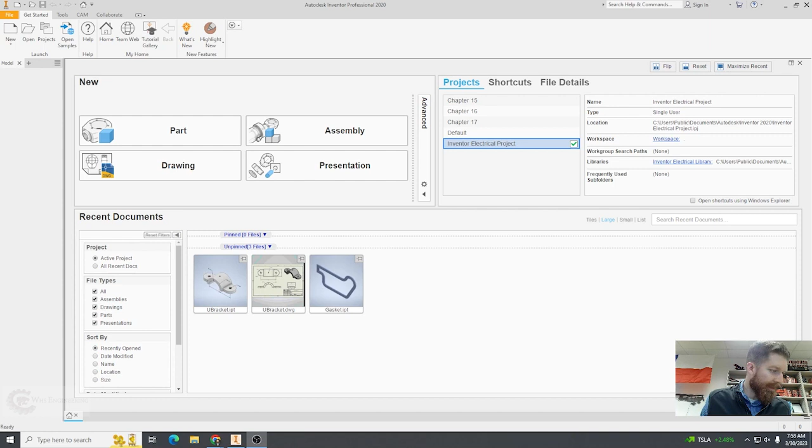Chapter 10 today, Introduction to 3D Printing. Learning Objectives: Understand the History and Development of 3D Printing. I'm not going to get into that, I'm going to let you read the book for yourself. I don't want to bore you.

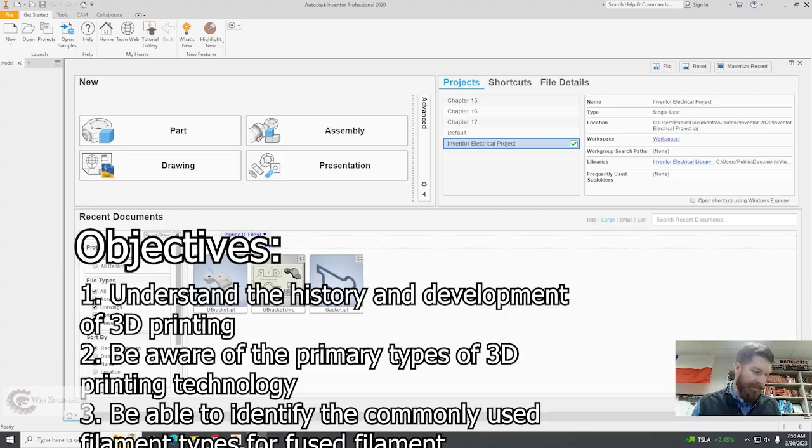Be aware of the primary types of 3D printing technologies, be able to identify the commonly used filament types, and understand the general procedure for 3D printing. That's where we're going to spend most of our time, going from a model to the 3D printed format. So we're going to use the rod guide from chapter 9. I don't have it saved on this computer, so I'm just going to model it up really quickly.

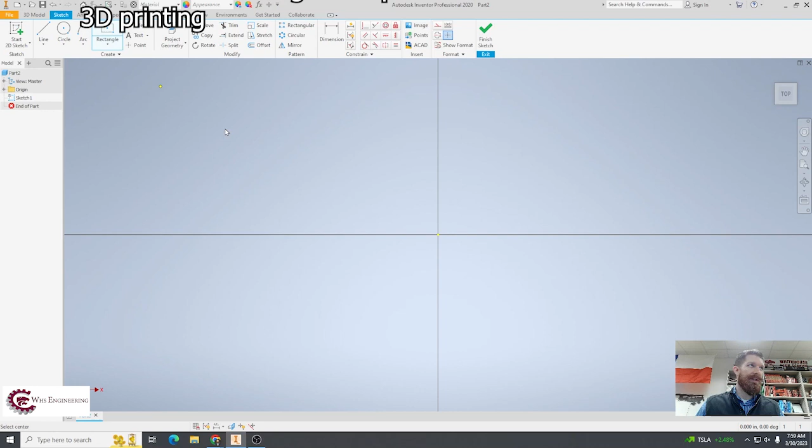This is from chapter 9. Mr. Dieter may have already shown you how to do this, I'm not sure. Let's start with the center point rectangle, with 1/4 inch fillets all the way around.

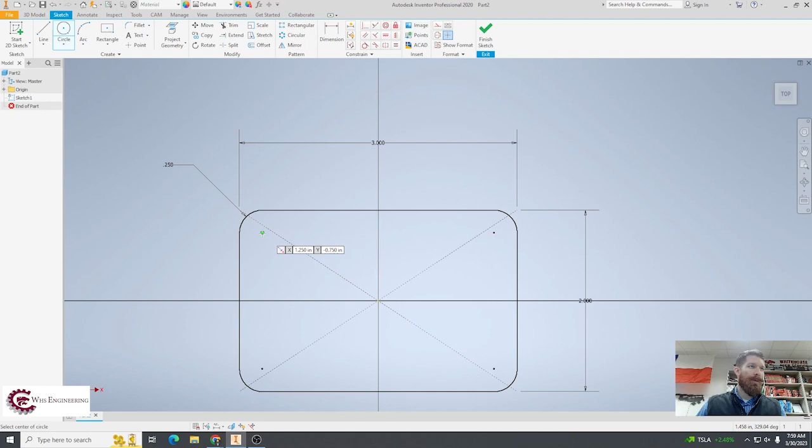Alright, we'll put holes at these center points. I think these are 1/4 inch as well. Finish, and extrude 3/4 of an inch.

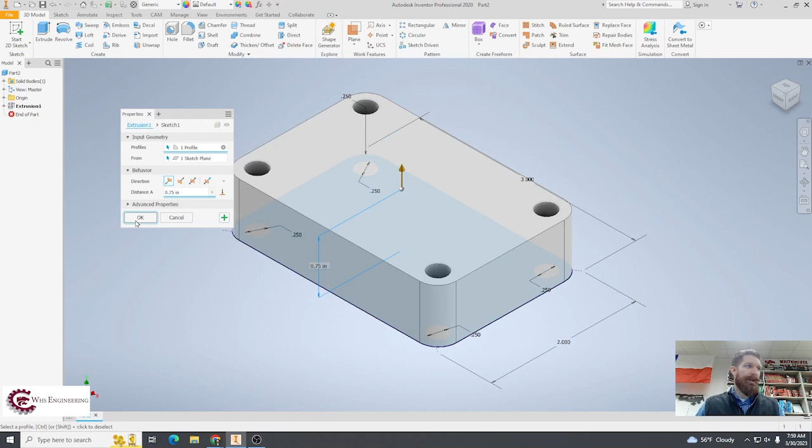And now we got to do something really weird. This is kind of an angled plane. So I'm going to go into planes, angle to plane around edge, and we're going to use the y-axis and the xy plane.

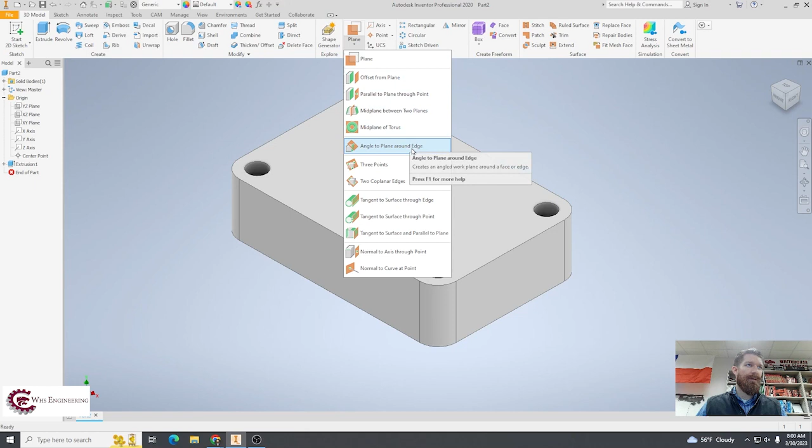That's what we'll do. Alright, let's see here. Yep, we're going to do the y-axis, angle to plane around edge, and then use this plane right here and make it 30 degrees. Is that what we want to do? Yeah, perfect. And now I'm going to sketch on this plane.

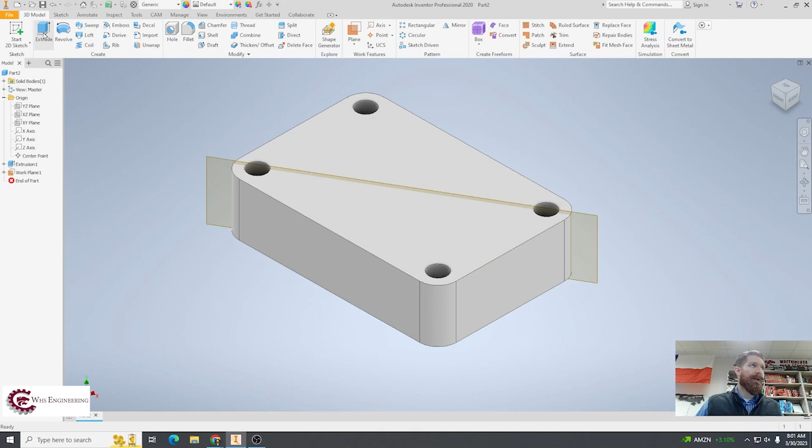So I'm sketching at an angle, I hope you can see that. And let me draw out the profile here. I always start with the top part.

This will be a 1.5 inch diameter circle, center point 3/4 inch above this. Perfect.

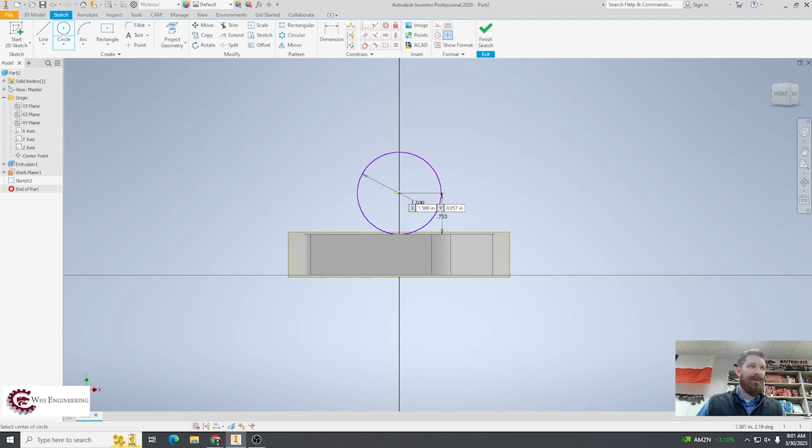And we got a smaller circle inside this. Looks good. And then I'm going to set this as a rectangle. Grab my trim tool.

That looks good. And then we're going to put a little cutout right here. This is going to be 1/4 inch by 1/4 inch, and be 1/4 inch above the base. Uh-oh, didn't like that.

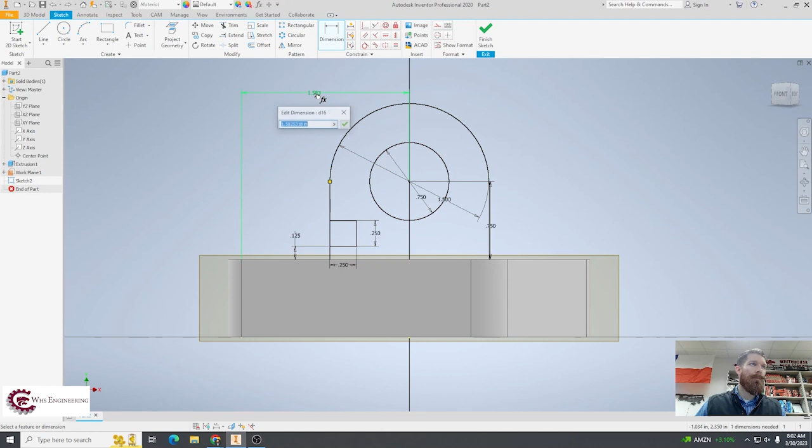Locked in place. And then I'm actually just going to mirror this on the other side. So I'm going to select these, draw a little line right here, and mirror this across this mirror line. Apply, and there, I've got it right there.

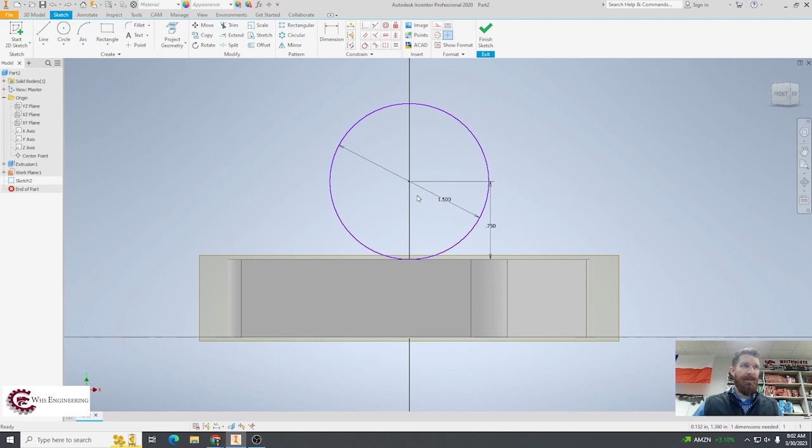That is not symmetrical at all. We need to fix this. So let this be a lesson, even I make mistakes. See how this is still purple? I've got to fix that because it can move, so I need to lock that in to the origin here. I need to make that dimension 0. That's much better, much better.

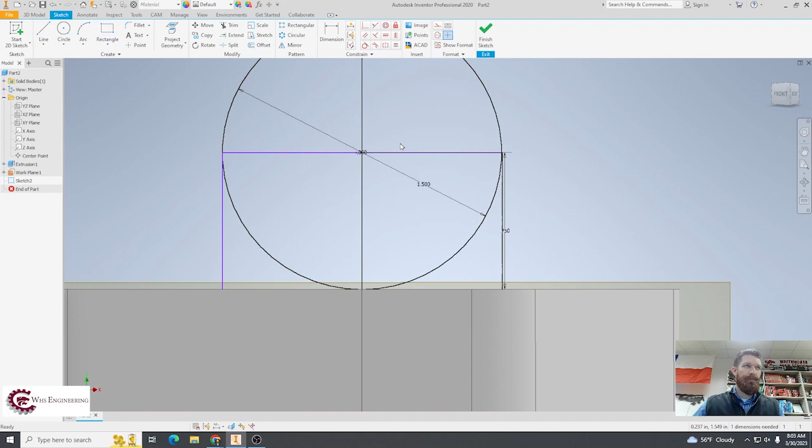Okay, let's try this again. We'll do a rectangle, trim this out, do a 3/4 inch circle here. This is looking better. And then we'll do a 1/4 by 1/4 cutout.

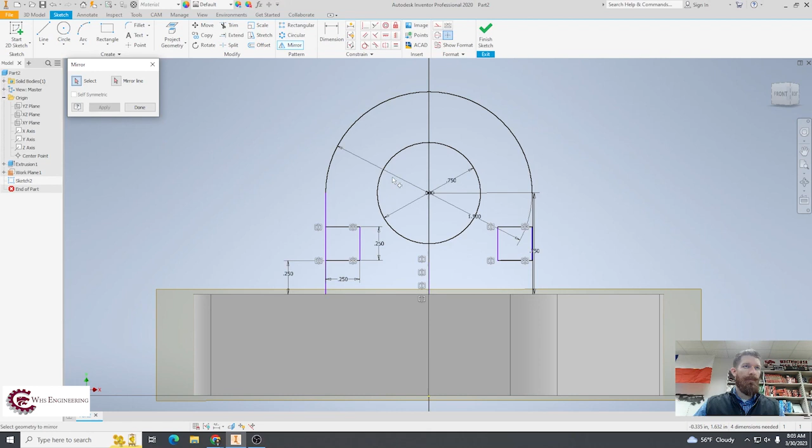1/4 above, and this time hopefully we can mirror correctly on this side. Hey, that's still not right. My goodness, what's going on here? Struggling. Happens to the best of us.

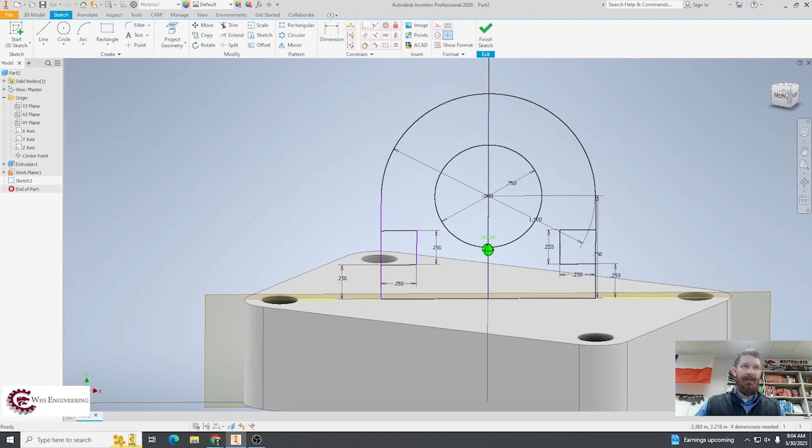From here to here, 0.25. Let's just try this and see what we end up with. Finish sketch. I'm going to extrude this portion mid-plane for a thickness of, what do we have, 1 inch.

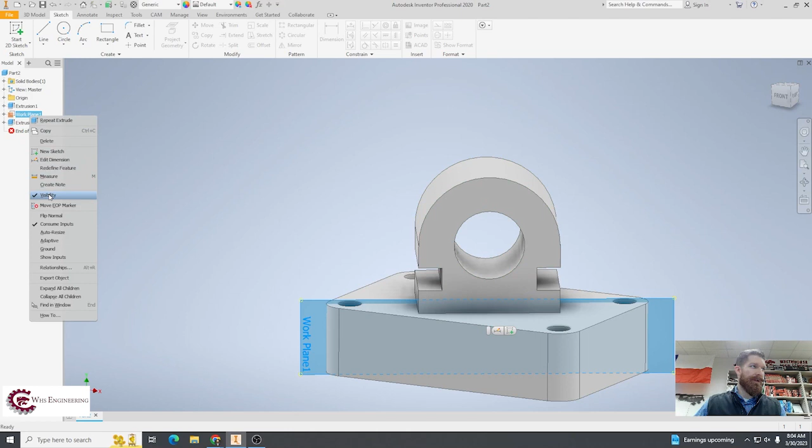And then I'm going to turn off the visibility on my work plane. Is that close enough to 3D print? I think it is, I think that's actually pretty good. We'll just roll with it regardless.

We've got an issue here, I should have made that tangent. Oh well, we're good. Actually, no, we're not, I'm going to fix it. That's going to bug me. Let's make this tangent, let's take this and this.

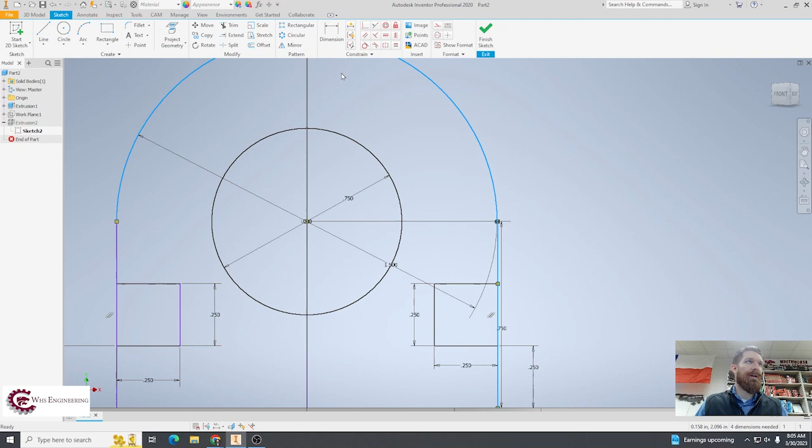What have I done? Oh, I went to midpoint. Okay, don't worry about it, we're going to roll with it. I'll come back and fix this later on. But the point of this video is not to model the part, the point of this video is to 3D print this part.

So what do we do now? Well, the first thing is we're going to go File, Save As. We're going to save our part, we'll call this the rod guide. Always give it a meaningful name.

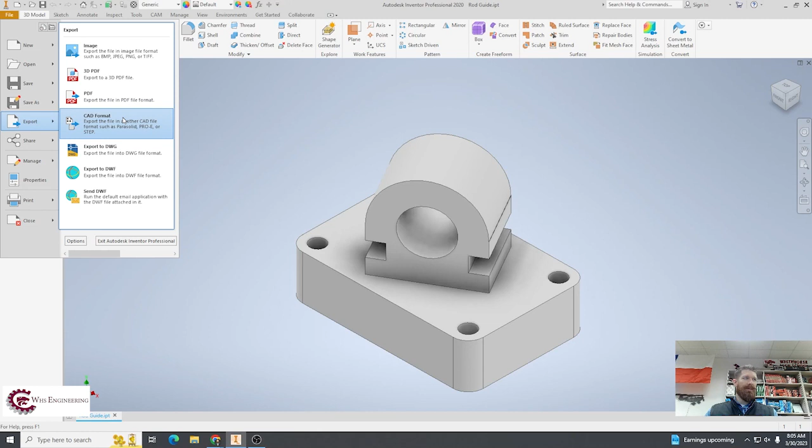And then we are going to go File, Export, CAD format I believe. Yeah, okay, File, Export—I'm going to do that one more time. File, Export, CAD format, right? File, Export, CAD format. And then down here, we're going to change the file type, we're going to do an STL.

STL, as in Sierra Tango Lima. You'll see that's a .stl file. I'm going to save that on my desktop, and you'll see what that file is for momentarily. So let's get rid of that.

There's that STL file. What I need to do now is find my 3D printing software. I'm going to use this thing called FlashPrint. FlashPrint is a slicing software, which means it's going to take your model and slice it into layers that become your printed part. So let's skip the update.

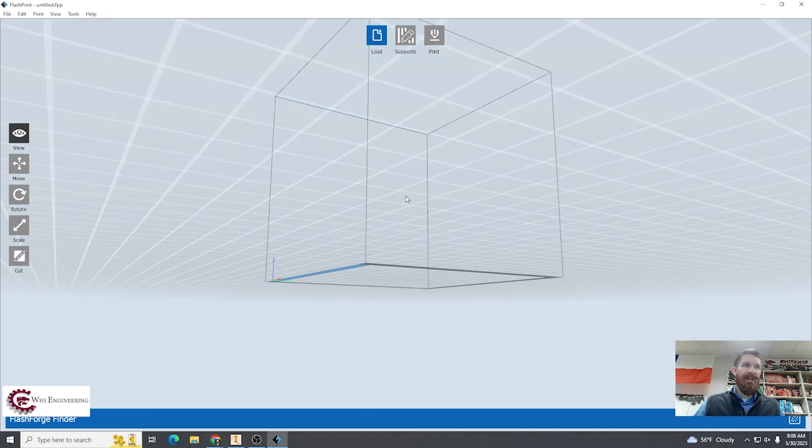This is kind of our 3D printing area. Different slicers are going to look differently. This is just one example. We're going to load that STL file in there. We can't load the model itself, but we can load that STL file. So there it is, rod guide STL. Open up. Yes, and you'll see that it's itty bitty teeny tiny.

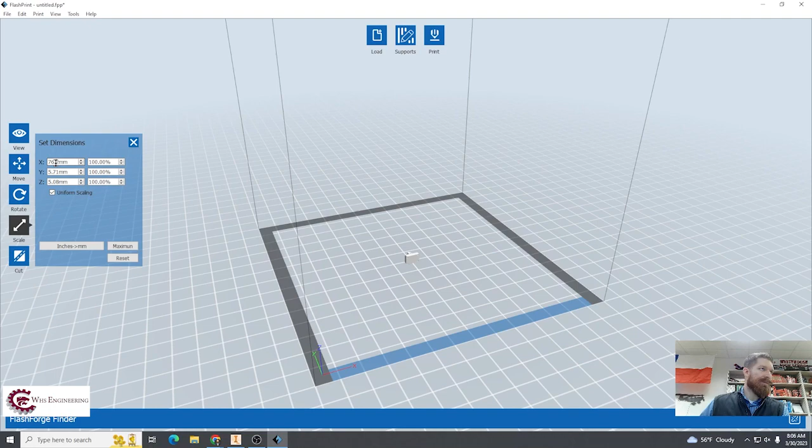So we need to rescale this. I'm just going to do 25.4 to 1. Let's make this 76.2. Yeah, there we go.

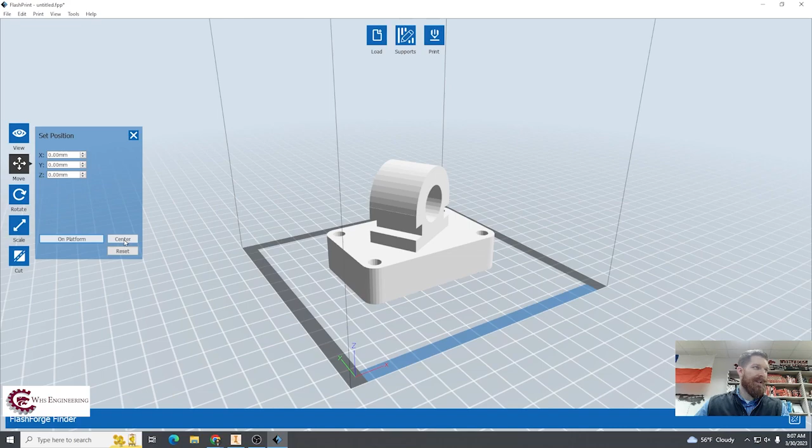Obviously you probably wouldn't want to print it laying on its side, so we can rotate this. Let's rotate it that way. And then you can see the part is below the bottom of the surface. So I'm going to say on platform and centered. So there's my part, it's sitting in there. It's scaled correctly. It looks pretty good.

And what I'm going to do now is identify if I need any supports, and I think that I do. So when do you need supports? You need supports when you've got kind of an overhang like this, and you may need them here. It just depends on how much of a gap you're trying to cover.

Because when the 3D printer extrudes its filament, if there's nothing for the filament to sit on, it's just going to droop down. It comes out horribly. Let me see if I can find an example of what happens. Let's see. Let's find an example here. Okay, perfect.

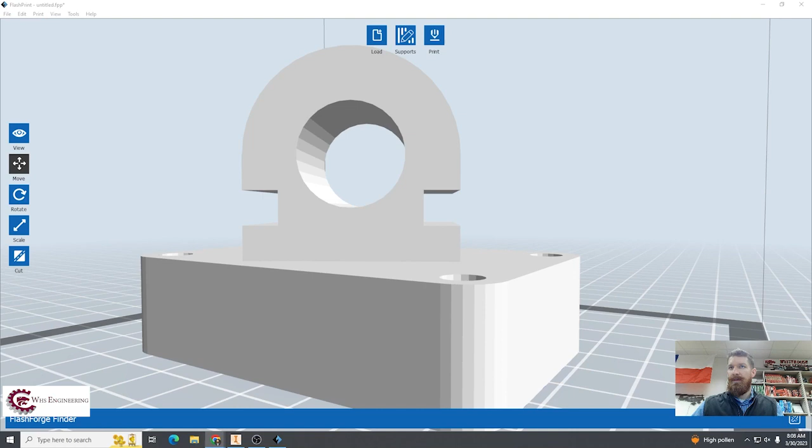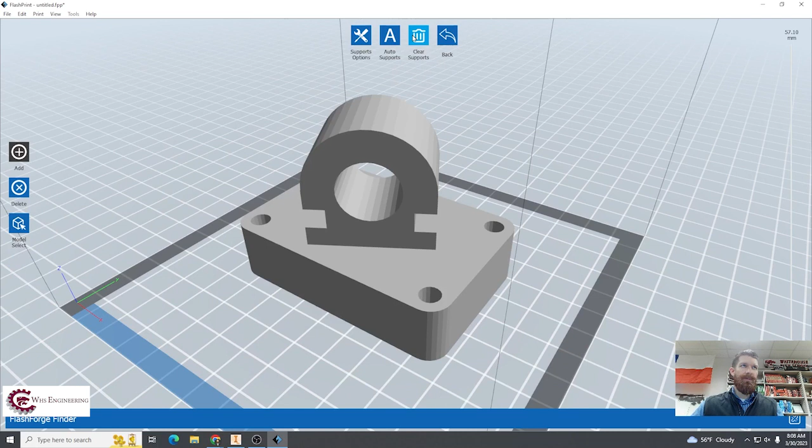So let's go back over here, and I'm going to say I do need supports on this rod guide. I'm going to go to supports. You can do them manually or you can do auto supports. I like to use auto supports, and you can change how it works, but these are the supports. This will allow you to print your part, and then when you're done printing, these just break away. You can break them off with pliers or sand them off or whatever you need, right? So that looks good. I'm going to go back. I am going to print.

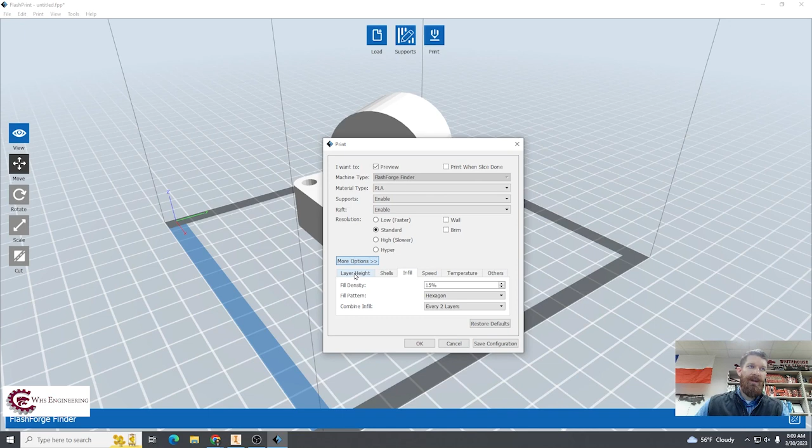There's a few settings you always want to use. I like to use a raft that just lays a bed under your print. You can print low resolution, standard, high, whatever you want. You can change your options, change the infill percentage, which is how much plastic is going to be on the inside, and you can change your print temperature. You can play around with it and set it up however you want.

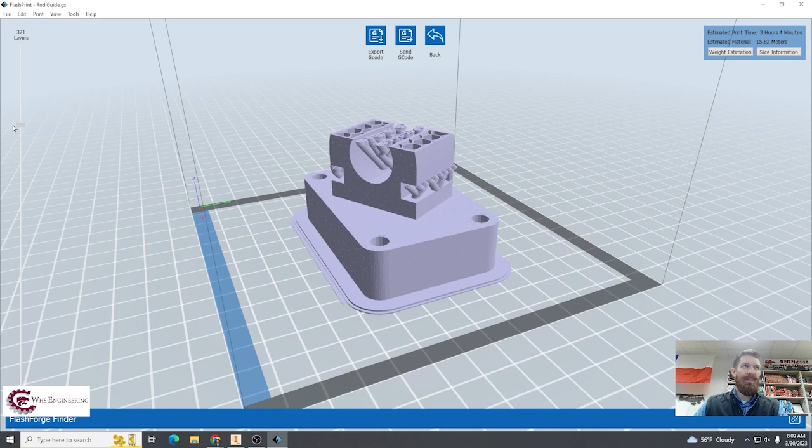When you hit OK, it's actually going to slice, S-L-I-C-E, the model. And here's what you end up with. It looks about the same, but you'll notice on the left-hand side, we've got layers - 321 layers. So if I just kind of look through these layers, here's how the print is actually going to work. Do you see that honeycomb in there? That's the inside of your print. You can go all the way down to your raft, and there's the base raft. This is what we're going to build on. So it begins to print, and this is the print coming up, closing in.

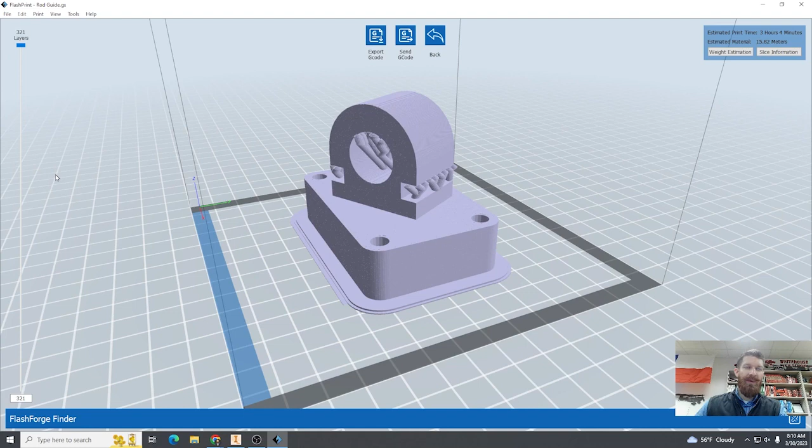Right here you can see your supports starting, going up all the way to the top. That's your print. Now, it would be really nice if we knew how much material this was going to take and how long it would take to print.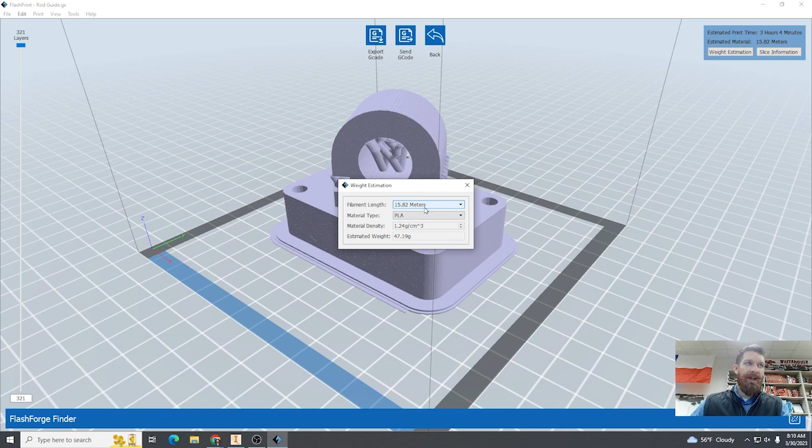Wouldn't that be nice? Well, thankfully, good slicers have that information right up here. You've got your estimated print time, 3 hours and 4 minutes, and your estimated material, 15.82 meters, right? Or you can do a weight estimation - 15.82 meters is about 47 grams, right? So that's your weight estimation. And then you can do slice information that gives you all of the parameters you need to slice.

When you're done with this, you just export the G-code and send it to your printer, and you're good to go. That's all there is to 3D printing. Super duper easy. If you have questions, let me know.